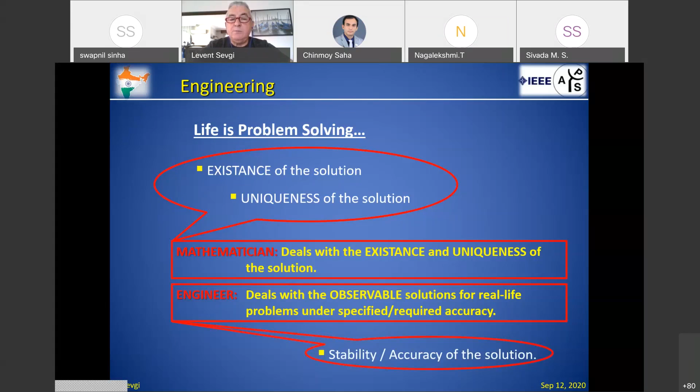Engineers do not seek the best solution, not the cheapest solution, not the fastest solution. Depending on requirements, which mean the budget, the time, the criticalness of the problem, engineers have to seek the optimum solution.

We are engineers. We deal with physics, we use mathematics, and we speed up with computers. So this necessitates an internal balance among mathematical background, which means theory, engineering, which means practice, and numerical simulations, which means computer capabilities.

We speak with numbers, but they can be given only as a result of a measurement or a computation. Therefore, engineers need to well understand the definitions of, for example, sensitivity, precision, and resolution, and the results are not meaningful if you don't state the error, the uncertainty range, with the confidence limits.

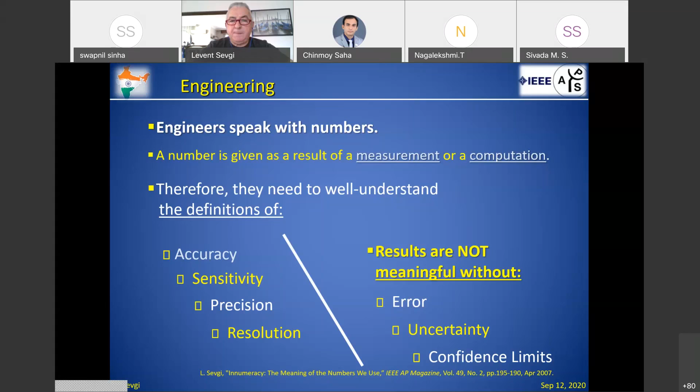Real-life problems are not deterministic, are not stationary, are not linear, and are not homogeneous, but especially for the undergraduate and in many engineering problems, we assume they are.

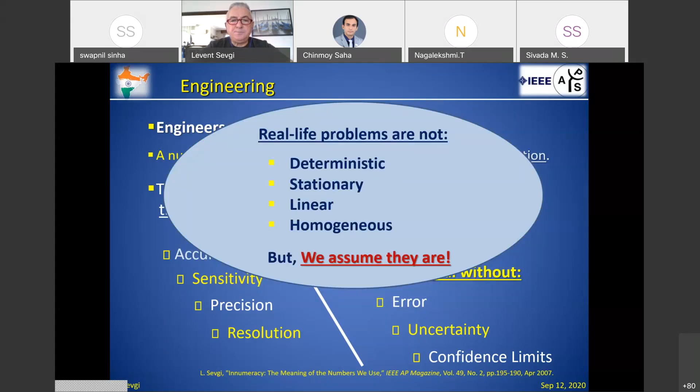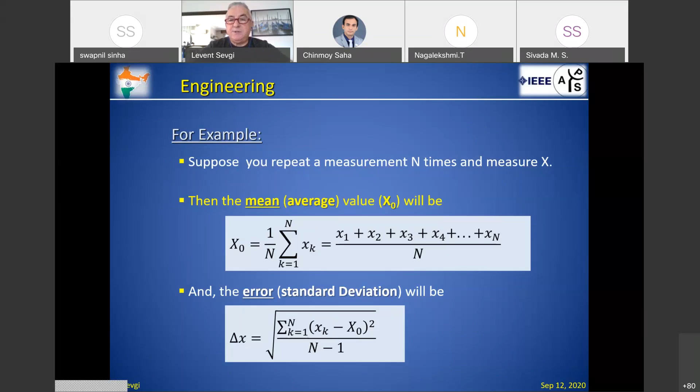For example, suppose you repeat a measurement n times with a quantity, let's say x, then the mean average value of x0 will be given by this equation. The error or the standard deviation will be given as shown on the slide. So you need to well understand the mean and the standard deviation in multiple measurements.

If you give a number which is after a computation, or a measurement, with a given confidence limit, let's say for example 90% confidence limit or 95% confidence limit, the measured computed value is x0 plus minus delta x, such as for example 123 plus minus 2 meters to measure the distance, which means all I can say is x is between 121 and 125.

So here are some fundamental questions. Who will do the test and measurements? In which environment will tests and measurements be performed? What type of equipment will be used in tests and measurements? Who will monitor or control the test and measurements? Who will control and authorize everything, the process?

How will you be sure that everything is okay or under control during these processes? How will you control systematic and random errors? How will you present the results? These are some critical questions that should be answered before the measurement. Keywords in measurements are authorization, accreditation, calibration, and certification.

We do computations, calculations. But remember, physics is a subset of mathematics, which is also a subset of the discrete world. So the most general one is the discrete world. So a mathematical solution may not be your physical solution, and a discrete solution may not be your mathematical solution. So it is the engineer's task to seek the physical solution in the discrete environment. So you have to get rid of non-physical solutions.

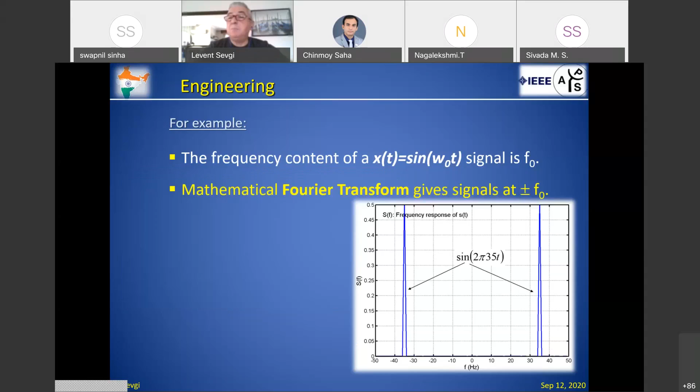The frequency of a sine signal, which is a single-tone signal, is f0, as shown on this slide. So the mathematical Fourier transform gives signals at plus and minus f0. So we have negative frequencies, which are not physical, but mathematically there are negative frequencies. And the discrete Fourier transform gives an infinite number of multiples of f0.

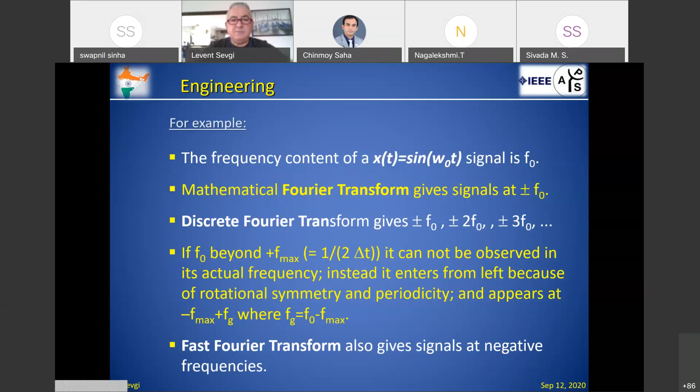You have to be careful about choosing the right signal, the physical signal, the meaningful signal among an infinite number of non-physical signals. Fast Fourier transform gives signals at negative frequencies. So here are the DFT or FFT challenges: discretization, numerical integration, and finite time duration. These challenges all introduce non-physical results. The resolution and maximum frequency depend on the record time in the time domain and the sampling rate in the time domain.

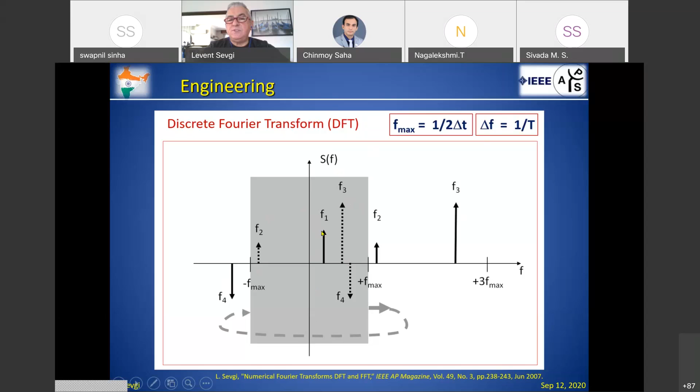For example, suppose you have 4 different tones, F1, F2, F3, and F4. And suppose the maximum frequency and the frequency resolution are as given on the slide in the grayscale area. In this gray area, only F1 appears at its right frequency, but the other 3 will appear as ghost signals. So F1 is a physical signal, but F2, F3, and F4 appear as ghost signals in your frequency range. So you have to be very careful when dealing in the discrete domain.

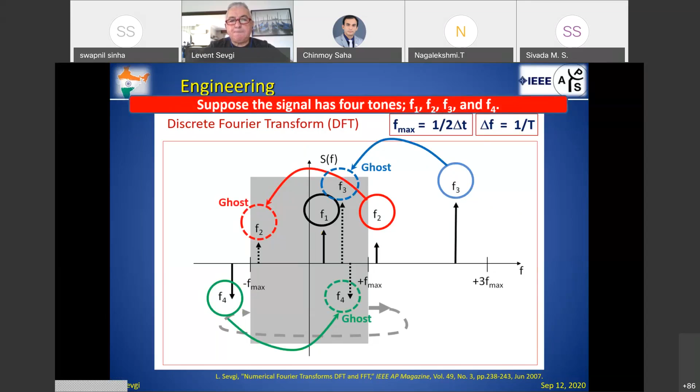These are all ghost signals. Signal record and sampling rate are not properly chosen. Only one of 4 tones appears at its frequency. The rest are ghost signals.

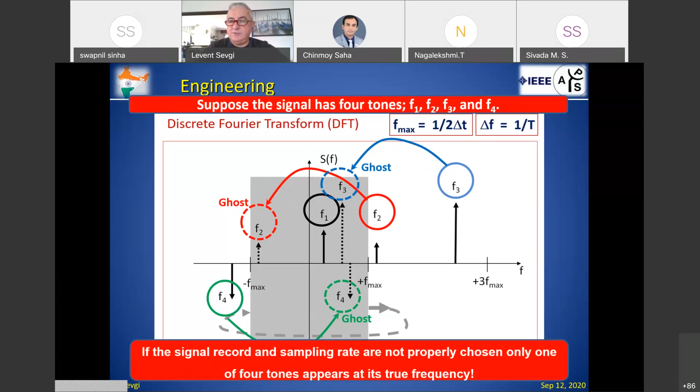Now let's see a few slides about electromagnetic engineering. The use of electromagnetic waves has been increasing. We have been surrounded by electromagnetic waves everywhere. We have communication systems, remote sensing systems, integrated command control, surveillance systems, transportation systems, marketing, and these are only a few areas where electromagnetic fields have critical importance.

Most of these systems operate at frequencies in the range from DC, 0 Hz, to terahertz, and the sizes vary from nanometer scale to kilometers wide. Almost all of these systems are broadband today and digital, so they have to operate close to each other, and they result in electromagnetic interference problems. Therefore, we have witnessed the transformation from engineering electromagnetics to electromagnetic engineering for the last few years.

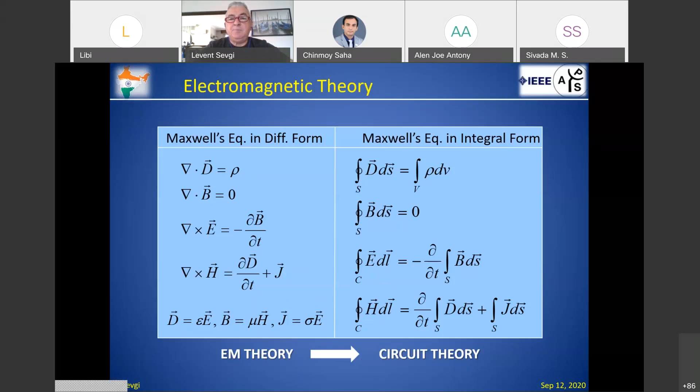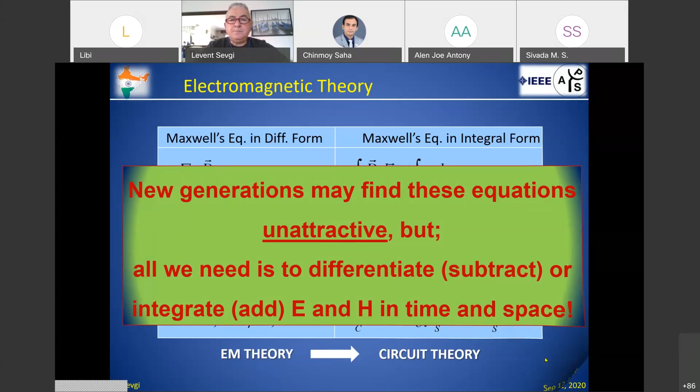New generations, young people, may find these equations unattractive because we have triple integrations, double integrations, second order differential equations. But all we need is to differentiate, which is nothing but subtraction, or integrate, which is nothing but addition of electric and magnetic fields in time and in space. So Maxwell's equations give you general solutions. Once you state your boundary conditions, it gives you only the solution which belongs to that. So Maxwell's equations plus boundary conditions give you your solution. The solution is unique, and if the solution is observable, then you can find the result.

We have analytical exact solutions either in integral form or in infinite series summation form, but they exist only for a limited number of highly idealized problems or geometries. Therefore, we have analytical approximate solutions, which we call high-frequency asymptotics. And for the last few decades, because of the fast growth in computer memory and speed, we have numerical solutions. But we still have discretization, memory, and computation time problems.

Usually, we can group electromagnetic problems into three. First, antenna and radiation problems. You start with Maxwell's equations and boundary conditions. Then you define and use auxiliary scalar and vector potential functions, and then derive electric and magnetic fields. So if you have an antenna radiation problem, it's better to use vector and scalar potential functions and then derive electric and magnetic fields.

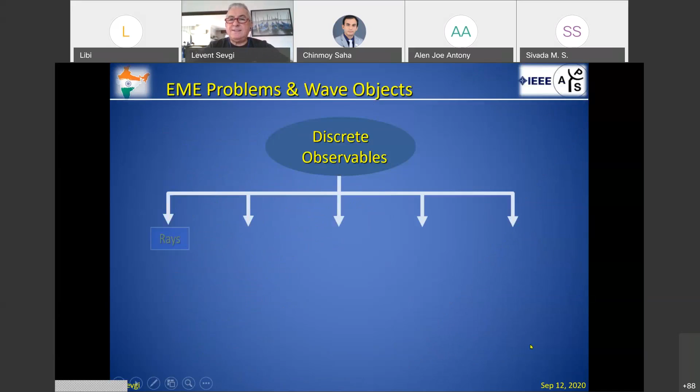The last one is guided wave propagation problems. Again, we start with Maxwell's equations and state equations. Then we apply transverse and longitudinal decomposition because we have a propagation direction. So in the longitudinal direction we have a Green's function problem, and in the transverse domain we have two problems. These are discrete observables. Observable means computable or measurable. We have rays, physical optics rays, diffraction, GTD, UTD, and PTD; guided wave problems, normal modes, adiabatic modes, and intrinsic modes. We have beams, complex source points, pulsed beams, and parabolic equation methods.

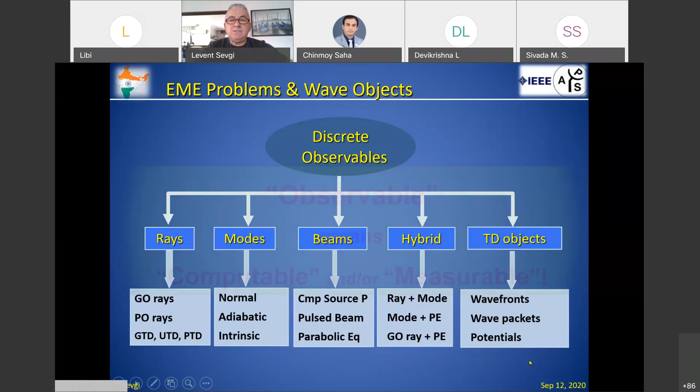Since none of these methods can give you general solutions, hybridization of these solutions with observables is a clever way to deal with electromagnetic problems. So you can combine rays and modes together. You can combine modes and parabolic equation, and you can combine geometric optics rays with parabolic equation. Because of computer capabilities in the last two or three decades, we also have time domain observables like wavefronts, wave packets, and potentials. As we said before, observable means computable or measurable.

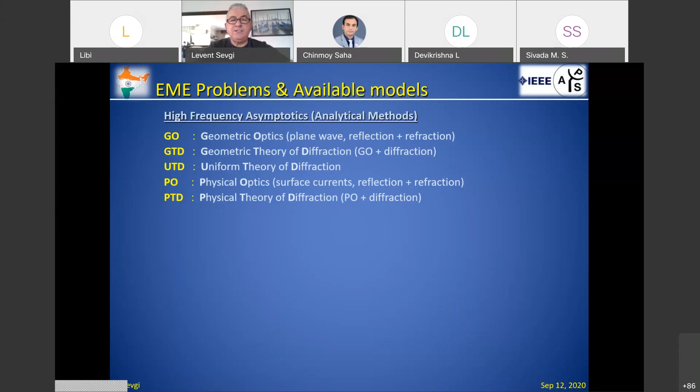Asymptotics, which we call analytical methods, are as shown here. We have GO, GTD, UTD, PO and PTD. The first three are ray-based models, so you use Snell's law. But the last two are induced current-based models: physical optics and physical theory of diffraction. Well-known numerical techniques are FDTD and TLM, which are time domain methods, or method of moments, parabolic equation, and finite element, which are frequency domain methods.

To face an electromagnetic problem, we need to consider the signal strength, time and duration, discontinuities, and geometric and boundary conditions. Among these parameters, we take into account the time-frequency relation when we use the Fourier transform, DFT or FFT, in the discrete environment. We need to take into account frequency and frequency-impedance relations.

Move on to electromagnetic modeling and simulation and some fundamental terms. So we deal mostly with deterministic problems, especially for undergraduate lectures. And we search roots of nonlinear equations. We usually have systems of equations, and with n unknowns and n equations, we solve them.

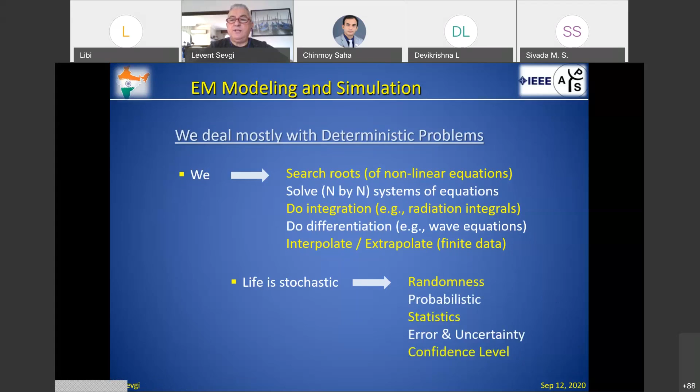Integration, like radiation integrals. We do differentiation, like, for example, wave equations. We interpolate and extrapolate results because we usually have finite data. But in life there is randomness, probability, statistics, error, and uncertainty at given confidence levels.

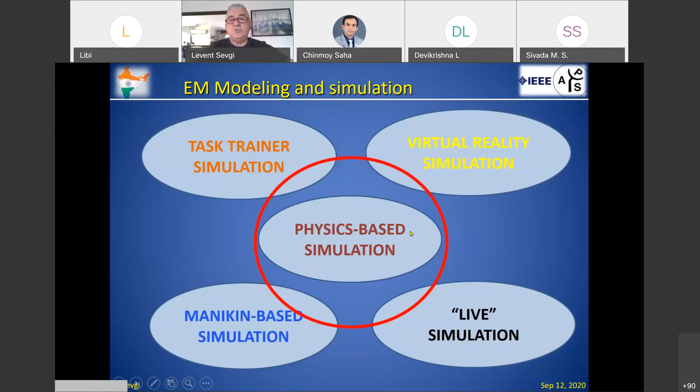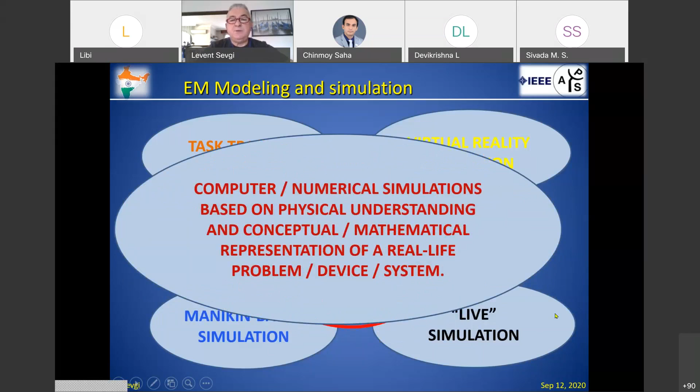So we have different types of simulation. We have task trainer simulation, virtual reality simulation, mannequin-based simulation, live simulation, and physics-based simulation. What we are discussing in this presentation is physics simulation, not the others. So the definition is as follows. Physics-based simulation is numerical simulations based on physical understanding and mathematical representation of a real-life problem, device, or system.

So we have a model, which is a...

Sir, sorry for interrupting. The voice is kind of feeble, so can you increase your voice or do some adjustments there? The volume? Yes, sir. Like some adjustments or headset. I think it's feeble, kind of. So how is it now? Is it okay? Yes, sir. It's okay now. Okay. Thank you, sir.

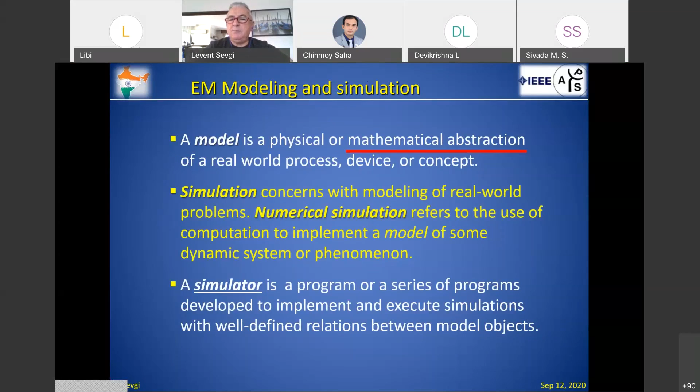So a model is a physical or mathematical abstraction of a real-world process or concept. Simulation concerns modeling of real-world problems. It is nothing but a program or a series of programs. And here are the questions when you deal with simulations. Why and when do we need simulation? Very often, testing is expensive and time-consuming. Sometimes it is dangerous. Sometimes it is impossible to do tests with real systems. And sometimes we don't have the real system.

That's why we model and simulate. We try to understand the system with modeling and simulation first, and then create the system. And finally, we can play what-if type games once you model and simulate your problem.

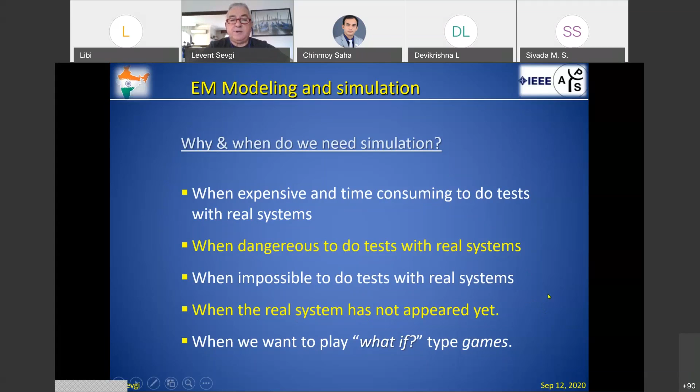So we have real-world physics, we have mathematics, the conceptual model, and we have the computer program. The real-world problem is unique, but there may be an infinite number of mathematical or conceptual models. We choose one of them, and from that mathematical representation or conceptual model, we write our own computer program. But everybody may write different types of programs, and then you get the results.

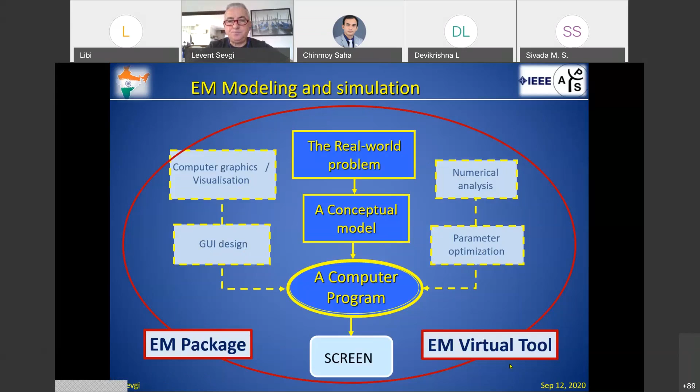So within these, we have numerical analysis and parameter optimization modules. And once you finalize it, you can add graphical user interface design capabilities for visualization purposes. And we call this an electromagnetic package or electromagnetic virtual tool. So you start with Maxwell's equations, you do discretization, and get your virtual tool.

And virtual tools are either in closed form representation or in open form representation. A closed form representation is the method of moments. You have n unknowns with n equations. So they are stable, but huge matrices are required. And the construction and discretization of the problem may be a challenge. For the open form, iterative representation, an example is FDTD. It is conditionally stable, but the sizes are small and the construction or discretization is easy.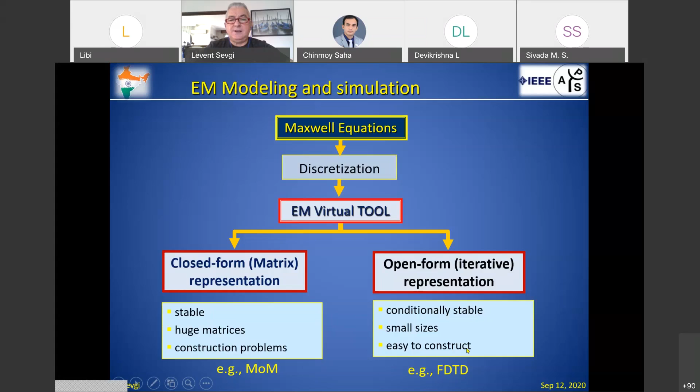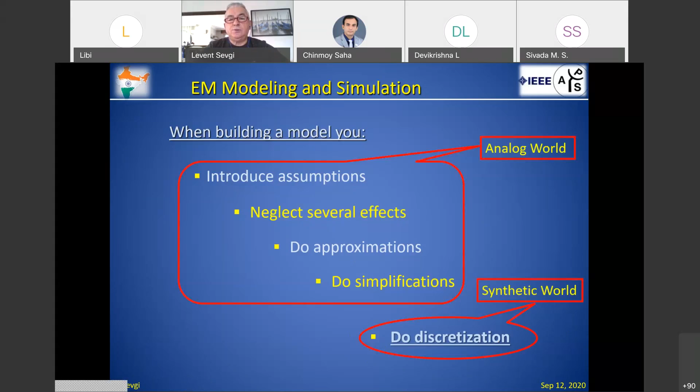Once you have your electromagnetic package or virtual tool, you need calibration. So in the following few slides, I'm going to show you how we calibrate a software. When you build a model, remember you introduce assumptions, you neglect several effects, you do approximations and do simplifications. And when you use a computer, you do discretization. The first four of them belong to analog world. The last one is synthetic world. So it's a real challenge to do a job in a discrete environment.

So validation, verification, and calibration become key. The definition of validation is as follows. It asks the question whether the right model is built. On the other hand, verification asks the question whether the model is built right. And calibration is nothing but testing the result against reference data. But what is the reference? That's the critical question.

Analytical exact solutions can be used as reference. For example, we have the perfectly electrically conducting flat earth and the two-ray model. It is used to calibrate, for example, open field test sites. We also have half wavelength dipole and horn antennas with exact mathematical representations. Therefore, they are used in antenna calibration.

But remember, once you calibrate your open field test site, antenna calibration can be done easily. Just the opposite: if you have calibrated antennas, you can calibrate your open field test site easily. So analytical exact solutions are very valuable, but there are only limited solutions.

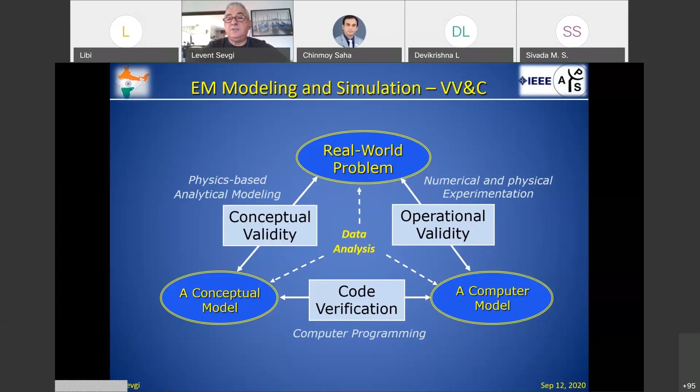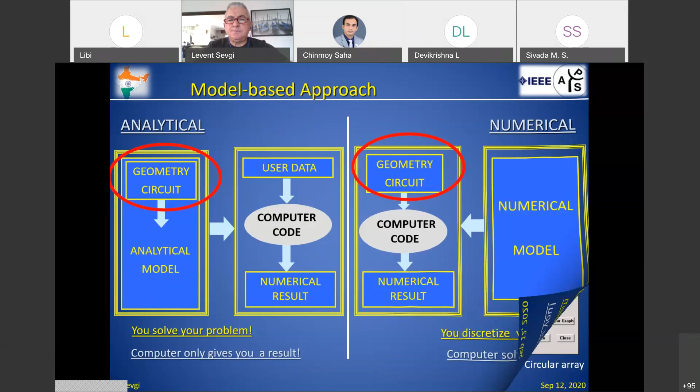Sir, so sorry for the interruption. Sir, once again, the voice is getting distorted. Are you using any headset or something like that? Yes, let me... how is it now? Hello? Yes, sir, it's audible now. It's clear now. Okay. Just put the mic to your t-shirt or something. Can you hear me now? Hello? Yes, sir. It's okay now.

Okay. So let me give you a few examples. Now here you see isotropic radiators, either in linear form, planar form, or circular form, and then you change some parameters and get different beams and steer them. On the left, you see a linear array. On the right, you see a circular array with a symmetrical beam.

So this is something undergraduate students prepared maybe 15 years ago. And it is an analytical model-based approach because there is only one equation behind this virtual tool, as you see. So everything is solved by yourself, and the graphical user interface gives you fancy results. But this is an analytical model-based approach.

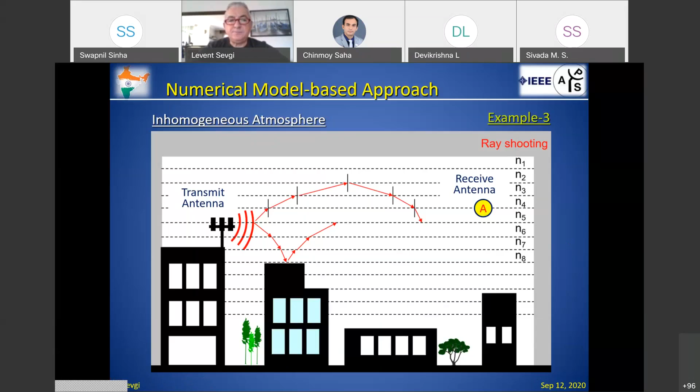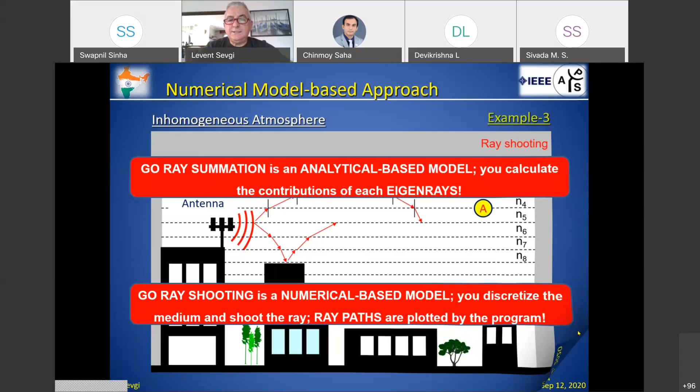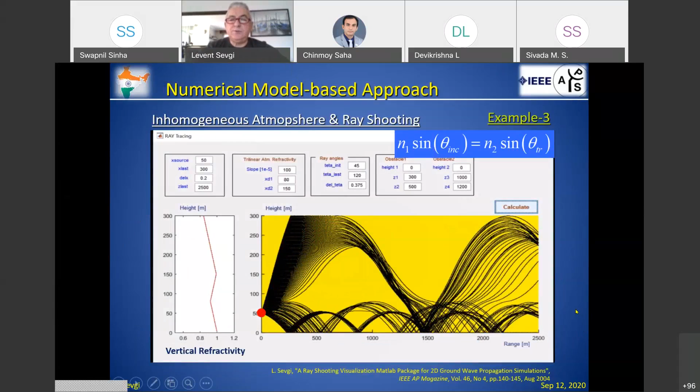Ray summation is an analytical-based model calculating the contributions of each eigenray. But ray shooting is a numerical-based model which discretizes; ray paths are plotted by the program. When the medium is inhomogeneous, rays are not straight lines, so vertical refractivity is trilinear, and you see how rays from the source propagate along the range. For example, again, this video shows you a non-homogeneous atmosphere.

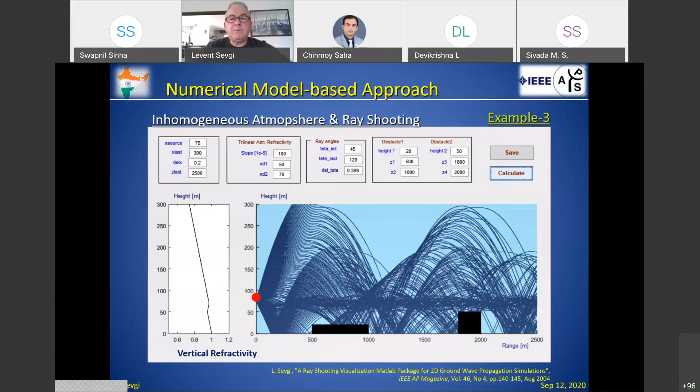Another example is the parabolic equation method. Here you deal with the two-dimensional Helmholtz wave equation, and you have height and range. So in two dimensions, you have wave propagation in all directions, along height and along range. But when you do this approximation, when you get rid of fast variations along range, you get the parabolic form, and the parabolic form is a one-way forward propagation model. On the other hand, the Helmholtz wave equation is forward propagation and backward reflections.

So the solution of the one-way parabolic equation is in terms of the Fourier transform, FFT. See the Fourier transform example. If you give me the vertical profile on the left, I can propagate it step by step to the right, just applying this equation. So give me the U function, which is the vertical profile. I apply a Fourier transform, a multiplication, get the inverse transform, another multiplication, and get the field at the next range step along the whole vertical domain.

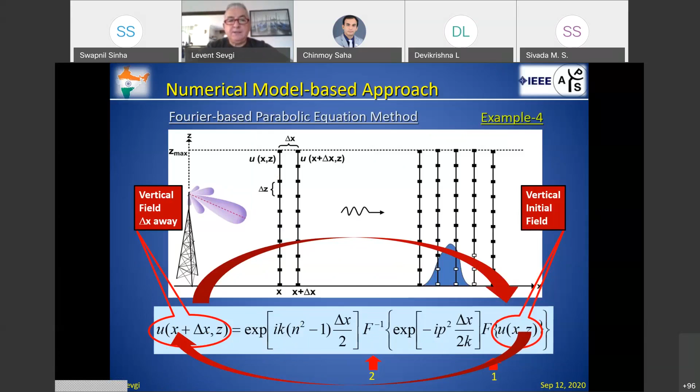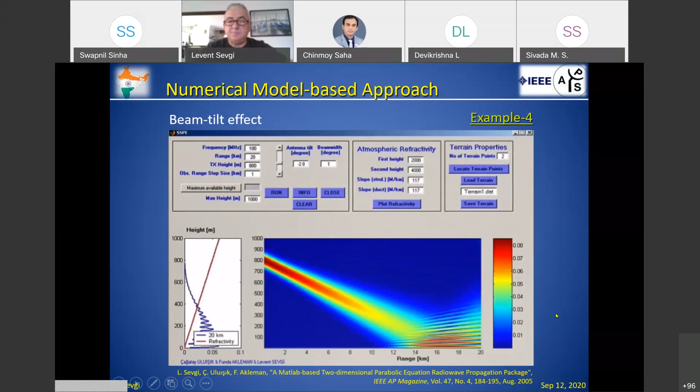So take this second one as the initial field and repeat the procedure until I reach the final range. This is a very nice and effective tool in modeling. Here's an example obtained by the package published in IEEE magazine, August 2005. This one shows you beam effects: beam tilt and atmospheric refractivity effects, to see how elevated ducts occur along range.

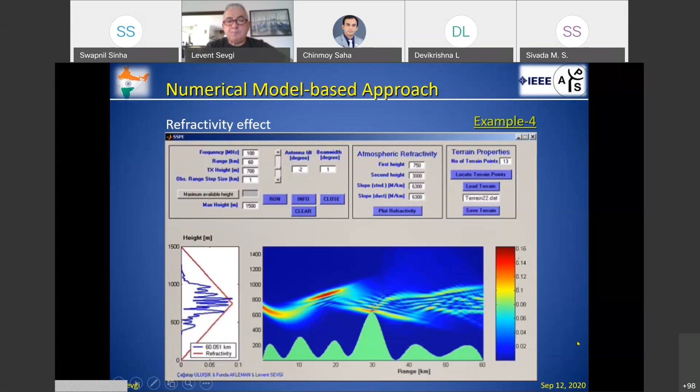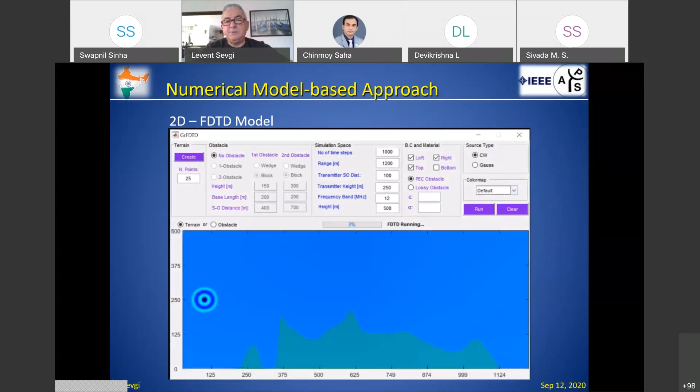Another example is FDTD-based time domain propagation. See, time domain propagation of the line source. You have a line source, a refractivity profile, and then observe how the line source propagates. Okay. So the previous ones are frequency domain results, but these are time domain results. These tools are numerical model-based approaches.

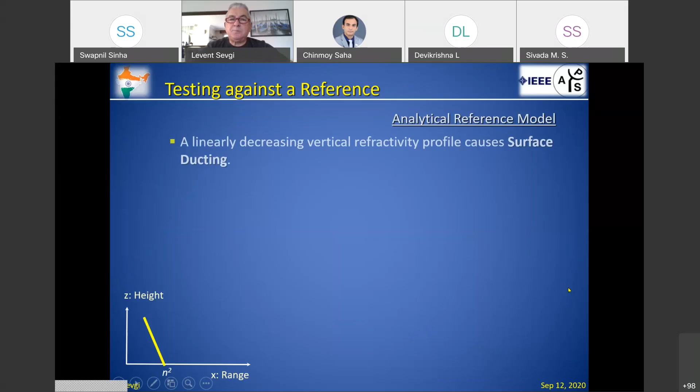Now, we have all those tools, but what about the data we get from those tools? How accurate or how correct are they? Is the number given by the computer a physical result or a non-physical result? So we need reference data. One analytical reference model for propagation is with a linear vertical refractivity profile, which causes a surface duct. So it's the two-dimensional wave equation, it's the Airy equation.

And the solution is given by Airy functions with this infinite series summation. And the two boundary conditions are at the bottom. SBC means soft boundary conditions, but in electromagnetics we call it the transverse electric case. HBC refers to hard boundary conditions, and it corresponds to transverse magnetic fields. So we have an analytical exact solution in terms of Airy function summation.

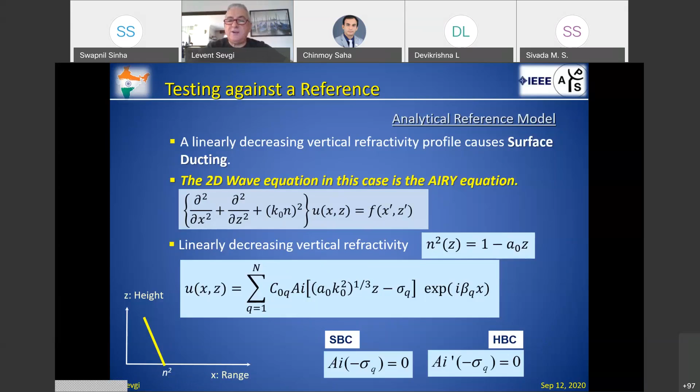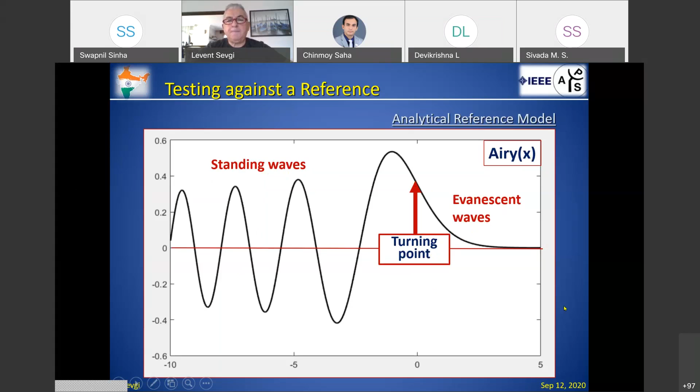This Airy function, if x is negative, we have sine type or cosine type variation, standing waves. When x is positive, we have exponentially decaying waves, and x = 0 corresponds to the turning point. The first mode, fifth mode, and 25th mode. So if you add up these modes, you can represent any type of analytical function or source function, and then solve the problem.

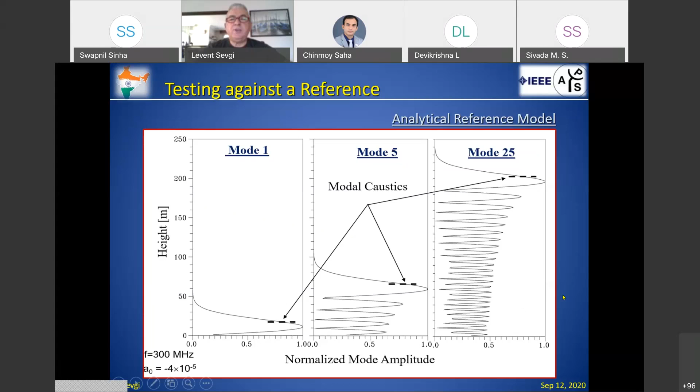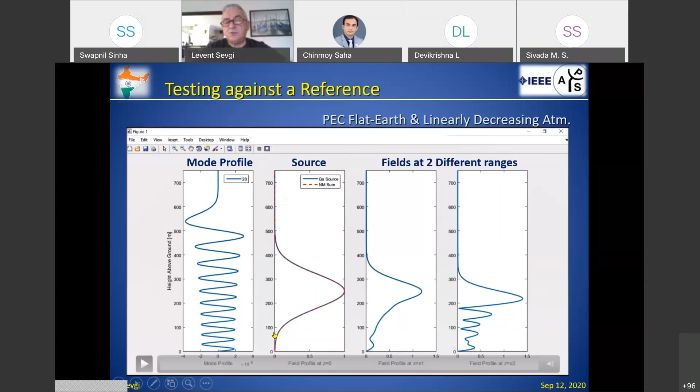In these examples, you compare analytical results with the parabolic equation. Here we have 2 beam type sources, one tilted up, the other one tilted down, and see how analytical and numerical methods compare at certain ranges, giving the field strength versus height, with almost perfect agreement between analytical, parabolic equation, and finite element.

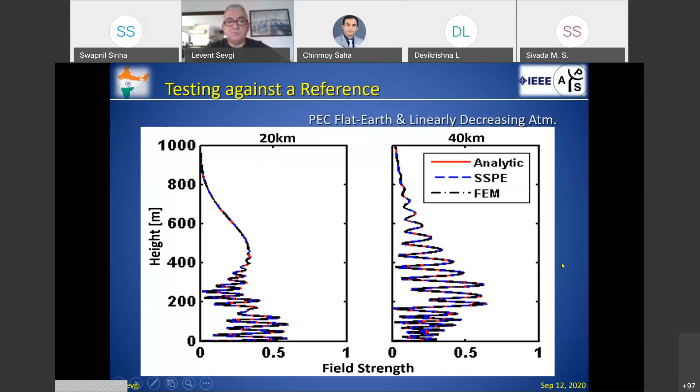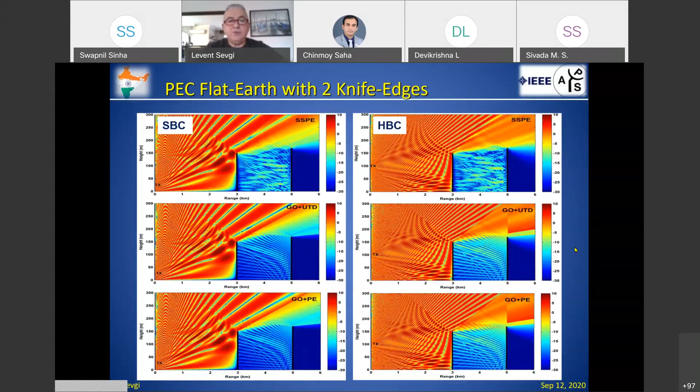Once you have calibrated your model, you can run many other scenarios, so calibration is critical in modeling and simulation, and you can find these discussions in our 2017 book.

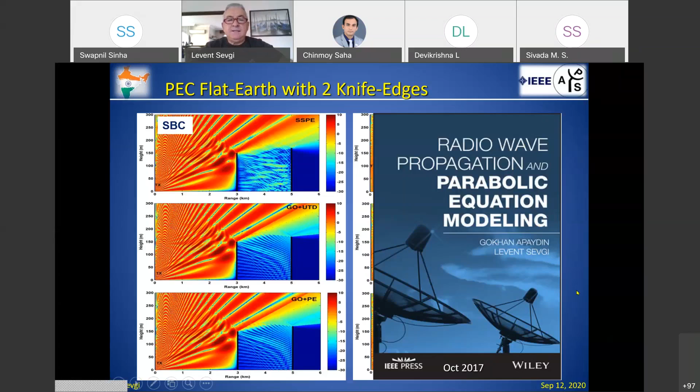Come to teaching and training next generations with electromagnetics. What is behind these? We introduced multi-purpose electromagnetic virtual tools that can be used in most classical electromagnetics courses. We have always looked for something that gives physical insight and is effective so that the young person can be intelligent. We need to note that users can change some parameters, but some other parameters should be fixed so that the user will not get lost in hundreds of parameters. It should be open to non-physical results so that the student may comment on them, may discuss the results.

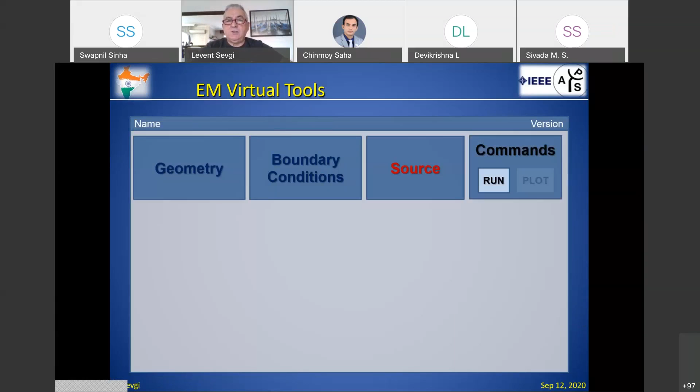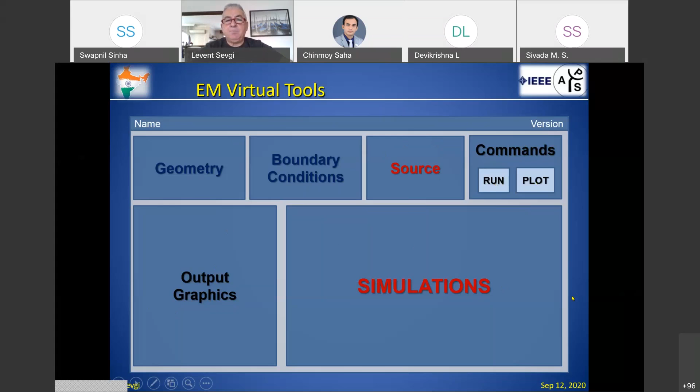So this is the generic front page, one page scenario. We have geometry parameters, we have boundary conditions, we have source parameters, we have output in graphics form or inspection windows, and we have commands like run, plot, and exit. This is the generic form, and these are some of the tools that we have published over the last years or so. These are ones that can be used in propagation.

These are for guided wave theory, undergraduate level or graduate level. These are some of them that can be used in scattering and diffraction. I already gave you examples about propagation and antennas. So let me give you examples of virtual tools for RCS and diffraction. This is an RCS in the three-dimensional domain.

On the left top, an airplane. On the right top, you see its graphics file in 3D format. At the bottom, its discrete FDTD and computational models. So the top pictures are created automatically by the program itself from a given graphics file.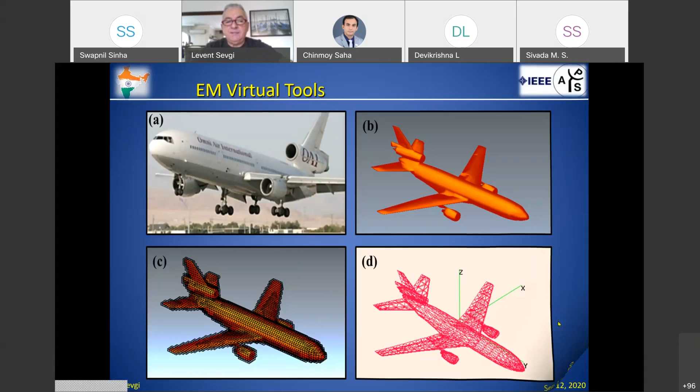And then you run and capture transient time domain fields. So you have a plane wave pulse that hits the object and you see the electromagnetic effects around this object. It happens only in a few nanoseconds perhaps. You record its transients and get the

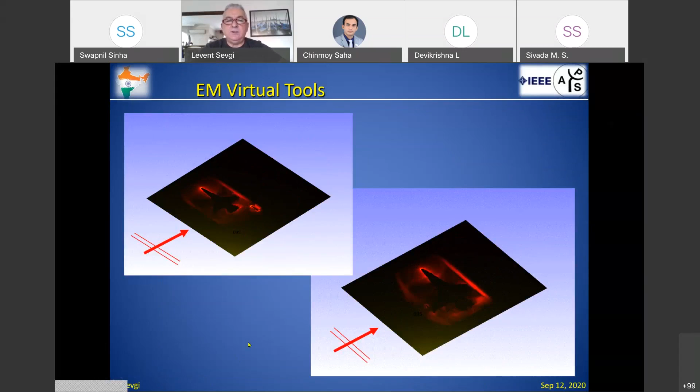another two videos, with one F-16 on the right and F-16s side by side on the left. So you can record them and see how electromagnetic waves interact and then get the results. So in RCS modeling, you run the FDTD, then run the Fourier transform and plot RCS versus angle or RCS versus frequency.

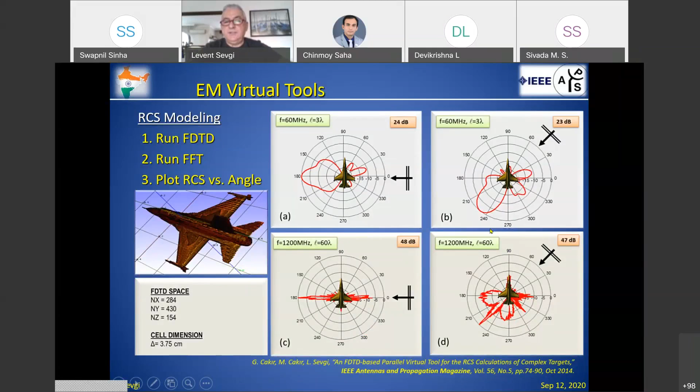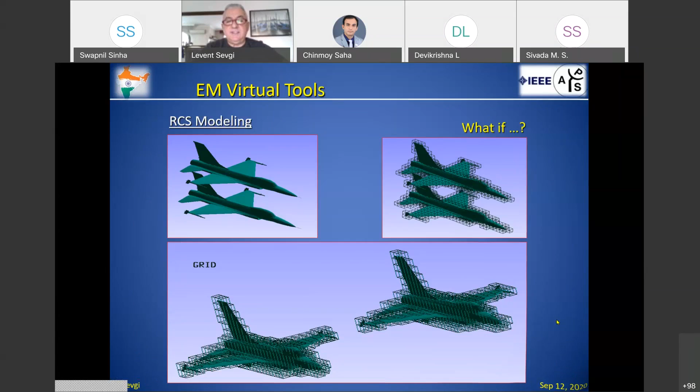These virtual tools are good not only for teaching but also for research. So as I said before, we can play what-if type games. What if F-16s are one on top of the other or side by side? You get a result like this one, for example. You see RCS versus frequency. The red one corresponds to one F-16, the blue one corresponds to two F-16s.

The scenario and polarization are also shown on this figure. So this is critical. At some frequencies, two F-16s' backscatter RCS is lower than one F-16. So two F-16s may be less visible than one F-16, but at other frequencies, they may be more visible on radar than one F-16. So RCS is very critical and very complex. You cannot predict, for example, high frequency from low frequency behaviors. So you repeat your calculation or your measurement at every single frequency.

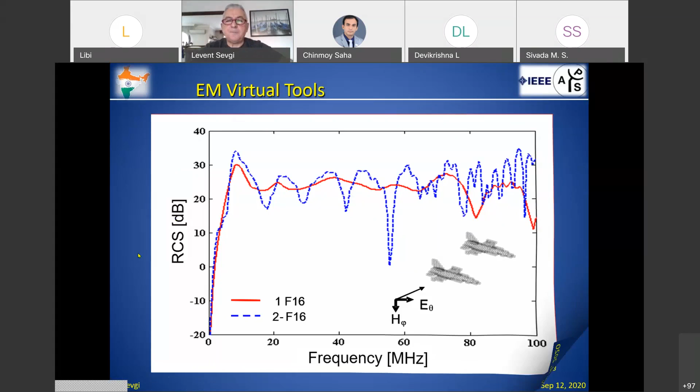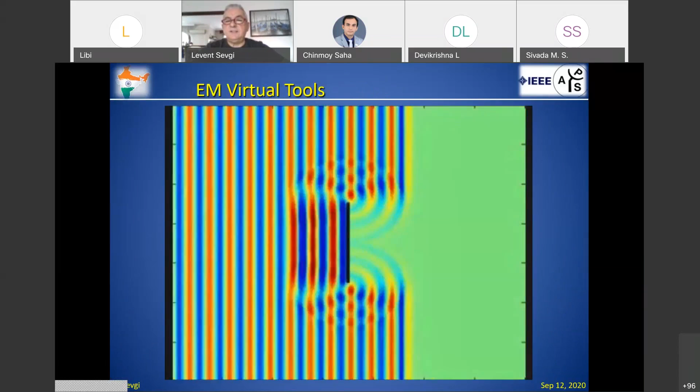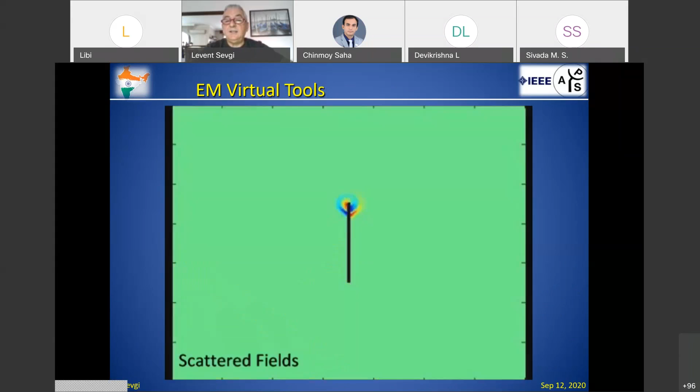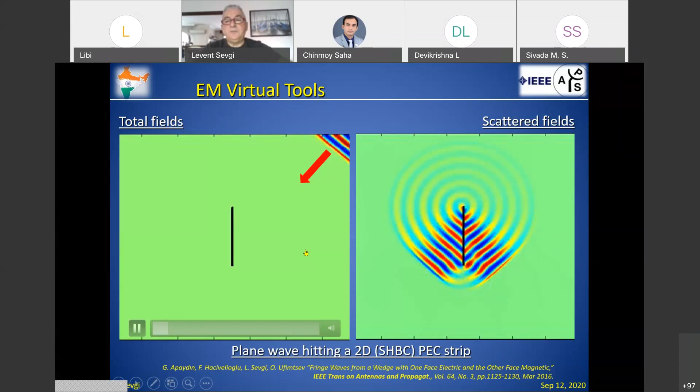So here you see an electromagnetic plane wave interacting with a perfect electric strip. You see the total fields. Now this is only the scattered fields. Here you see the total fields for different angles of incidence. And when you remove the incident field, you get the scattered field. Videos showing total and scattered fields at the same time include incident field and scattered fields. Scattered field is equal to total field minus incident field. You can play what-if type games with different boundary conditions and observe how electromagnetic waves behave.

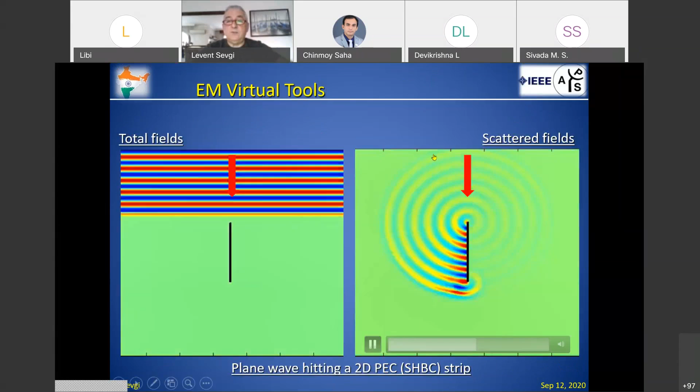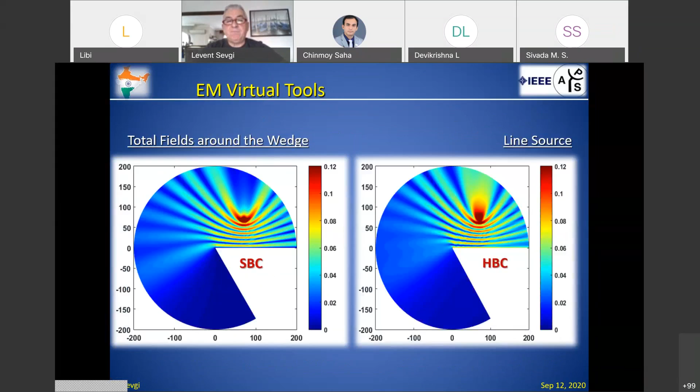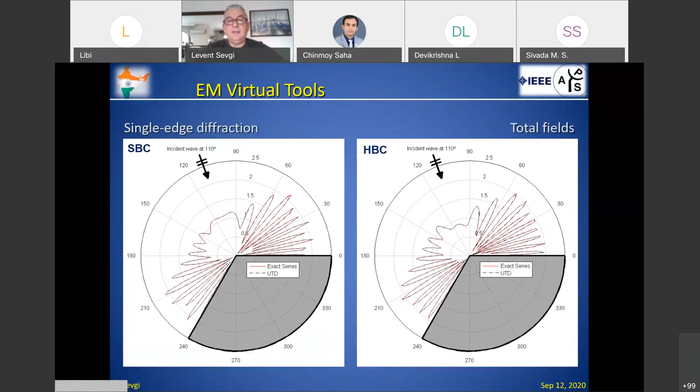This is our recent electromagnetic package. It is used for diffraction on analytical models as well as numerical models. So we combine high frequency asymptotics like UTD and numerical models for objects. Fields around the wedge, soft part left, hard part right of the line source. Here you see total fields on the left and only diffracted fields on the right. If you subtract the incident and reflected fields from the total fields, you get the difference. Single-edge diffraction, total fields. Our last book will appear in 2 weeks, after 2 or 3 months delay. The title will be Diffraction Modeling and Simulation.

Now, the conclusions. Wave-oriented electromagnetic engineering is an effective way of identifying both technical and educational challenges. Computer capabilities have revolutionized the analysis of modeling and simulation. Understand the physics behind the mathematics before using it, and validate results with experiments. Keep in mind the assumptions and probability. Look at the object as a whole.

Excuse me, sir. Hello, sir. Your voice is breaking, sir. Excuse me? Hello, sir. Your voice is breaking. Can you speak a little louder, please? Hello? Yes, sir. Now it's okay. Okay.

So multiphysics has also become essential, so you need to establish interdisciplinary collaborations. New approaches such as virtual reality or artificial intelligence are very attractive for engineers. Mass education: basic lectures such as measurement should be renewed accordingly. Training with these electromagnetic virtual tools is highly effective. Let the students play with these tools. Let them visualize electromagnetic wave-object interaction in the given scenarios and then create their own scenarios. They then start electromagnetic play with Maxwell's equations.